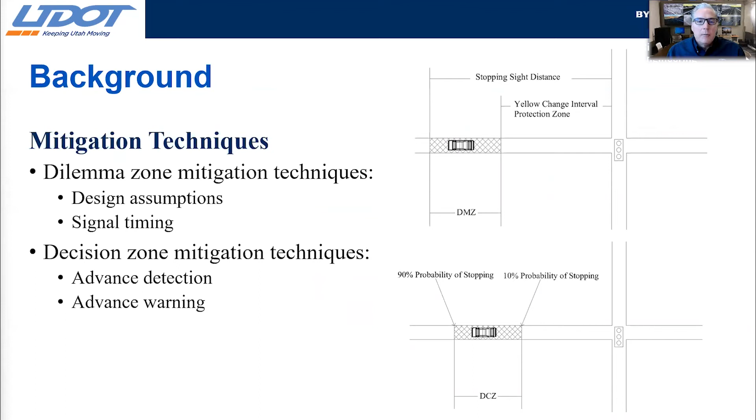The purpose of this research was to evaluate both the dilemma zone and the decision zone. This was accomplished by looking at different design assumptions and signal timing, as well as options for advanced detection and advanced warning. In our literature review, we identified several different methods for advanced warning signs. These included primarily sign-mounted dynamic signs with flashers. But UDOT wanted to do something more, so we looked at blank-out overhead dynamic signs with flashers.

The study site that we did our analysis on was the intersection of 134 South and Bangerter Highway. This research was conducted back in 2004 and 2005. As you can see from these pictures taken at that time, there have been a lot of changes to this area since the research was conducted.

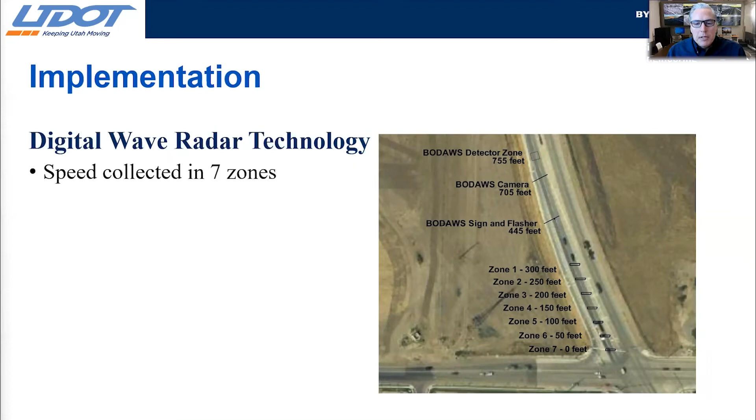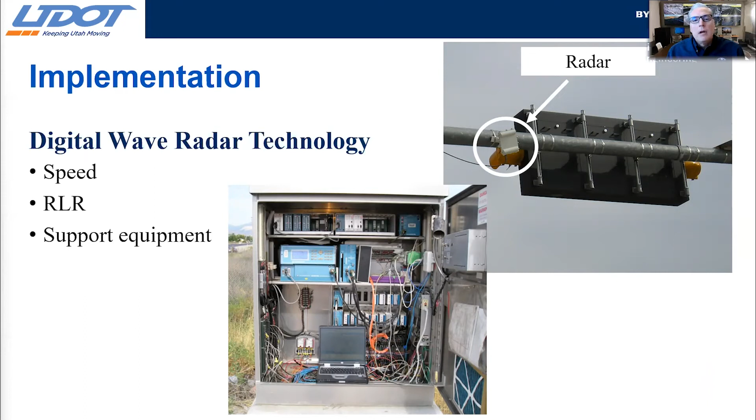To analyze the speeds in advance of the signal at 134 South, we used Wavetronix digital wave radar technology. At the time, Wavetronix was still developing much of their radar technology. In fact, this project was used by Wavetronix for the development of their SmartSensor Advance technology. We used the radar to collect speed data in 7 zones in advance of the signal. The radar detector was located on the back of the advance warning signal, and the signal controller cabinet was equipped with a laptop computer and support equipment needed to be able to collect the data at the zones specified.

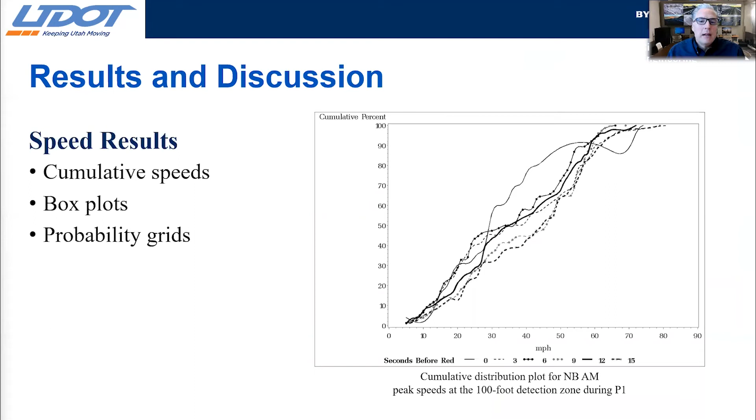One of the key indicators that we used to evaluate the advance warning signal were the results of the speed distribution at the intersection. We collected cumulative speed plots, developed box plots of speed data, and then generated probability grids of the speed results.

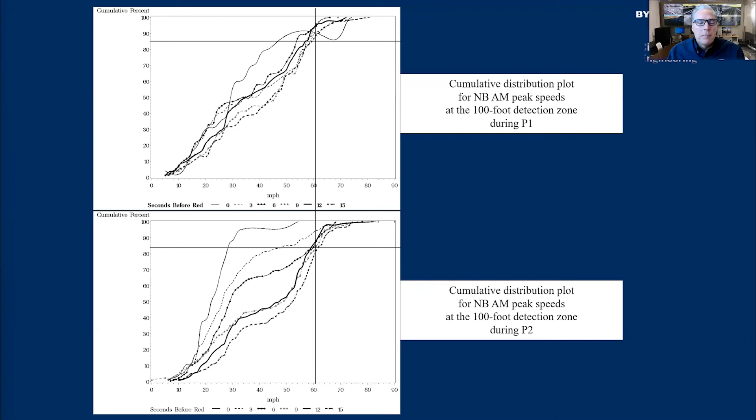The cumulative speed plot showed that prior to the installation of the advance warning signals, the cumulative speed distributions were relatively constant at the 100-foot detection zone, regardless of the time before red. After the advance warning signals were installed, the cumulative speed distribution plots showed very different results, especially for those vehicles 0, 3, and 6 seconds before the red. These drivers have been warned to prepare to stop, and the results showed that they did so.

The general conclusions from the research showed that the advance warning signal system did, in fact, impact motorist behavior. It also showed that when the signal was not operating correctly, motorists did not respond as expected. Minor changes were made to the lead flash time to find the sweet spot for the system design that we further developed in a follow-up research study. These systems have been installed along Bangerter Highway and in many other locations across the state, now with a static sign primarily for maintenance reasons.

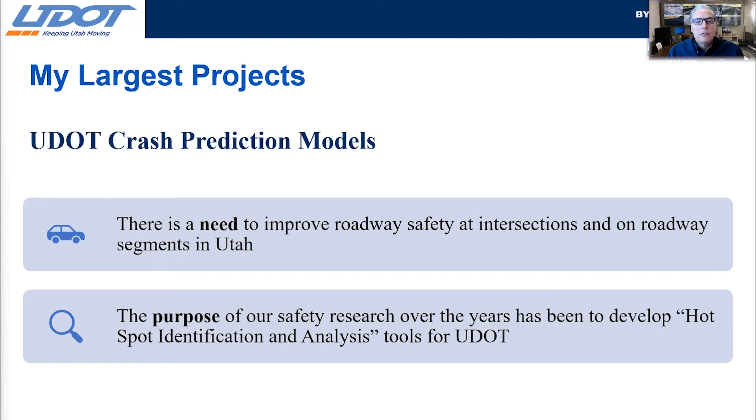My largest continuous project came about as a result of the need to improve roadway safety at intersections and on roadway segments in Utah. The purpose of this ongoing research has been to develop hotspot identification and analysis tools for UDOT to aid in their safety efforts. Over the course of the last 12 years, we have developed a series of models to aid in hotspot identification and analysis across the state. Today, I'll briefly introduce the most recent of these models, the crash analysis methodology for segments, or CAMS, and the intersection safety analysis methodology, ISAM.

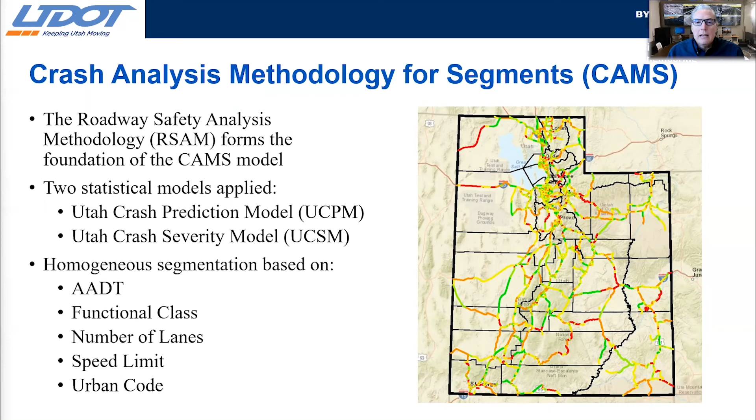The foundation of the CAMS model was the roadway safety analysis methodology, or the RSAM. Two statistical models were initially applied to the RSAM. These include the Utah Crash Prediction Model and the Utah Crash Severity Model. Both models were developed at BYU for UDOT and are formed from homogeneous segmentation of the roadway based on AADT, functional class, number of lanes, speed limit, and urban code.

The intersection safety analysis methodology, or ISAM, is the second model in the suite. While CAMS focuses on roadway segments, ISAM identifies intersection crash hotspots. These were originally based only on intersections with two or more state routes, but then we have continued to develop the model and expanded to a larger set of intersections. Again, two statistical models are applied to the intersections, and these models, however, are focused on intersection-specific crashes.

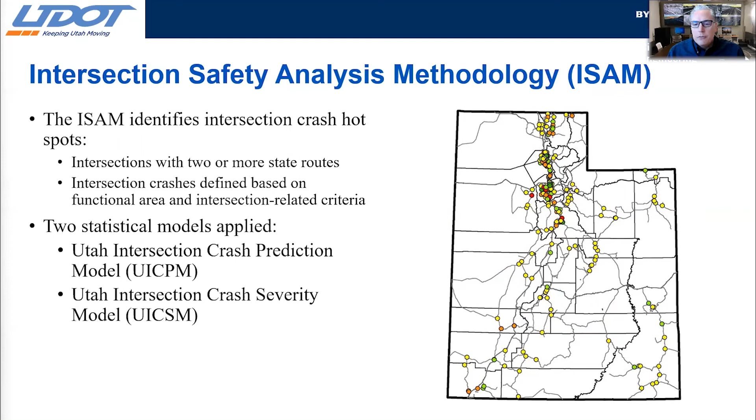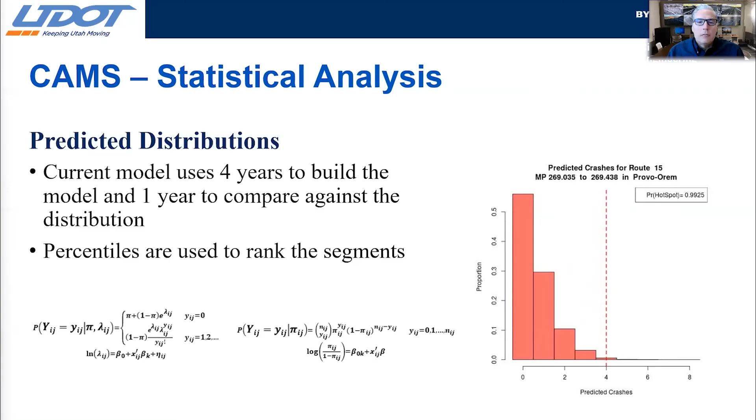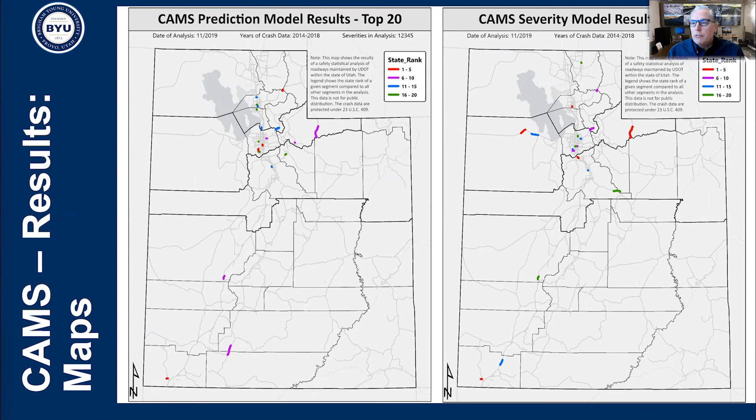Upon completion of the application of the model, the results of the analysis are reported in an Excel spreadsheet and then mapped using GIS to help visualize the location of the hotspot segments. These maps show the result of both the CAMS prediction model results and the CAMS severity model results. Note that if a segment shows up on both models, it means there are more crashes than predicted, and more of those are severe crashes than predicted. The last step in the process is the creation of segment safety analysis reports. These reports are also shared with the traffic and safety engineers to help them quickly evaluate the hotspots identified from the models.

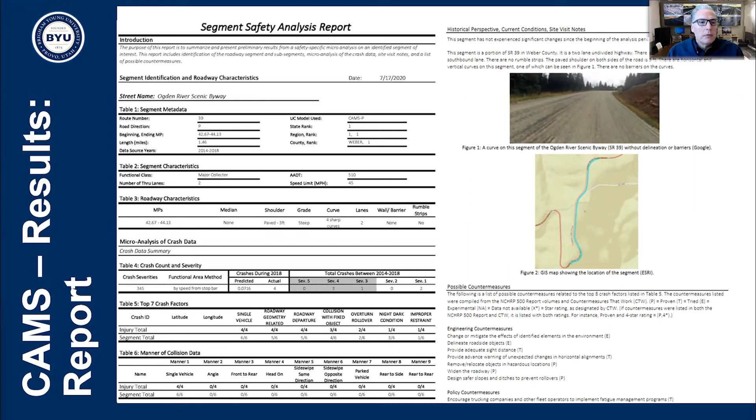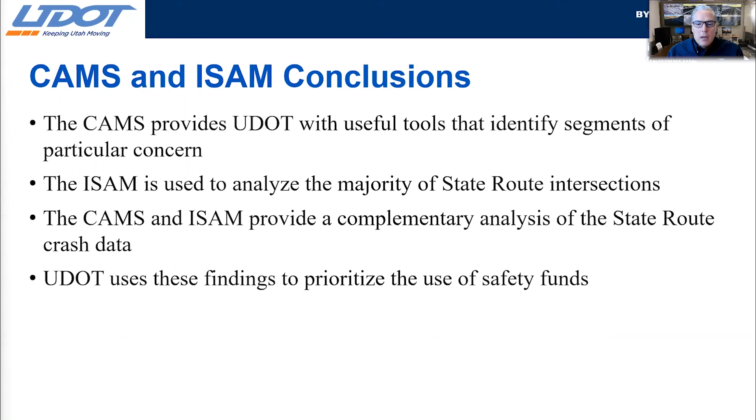There are numerous other steps involved in the CAMS and ISAM models. However, I will not provide that information today. I will note that the CAMS provides UDOT with useful tools that identify segments of concern along state roadways. The ISAM is used to analyze state route intersections to identify intersections of concern in the network, and the two together provide a complementary analysis of the state route crash data. UDOT uses these findings to prioritize the use of their safety funds.

I'd like to finish up by thanking the UDOT project champions that I've had the privilege of working with over the years. As you can see, there are several of them, and I'm really hoping that I didn't forget anyone. I would also like to thank the many employees that I've interacted with in the research division. These individuals have been very helpful in all of the research that I've conducted, and I've appreciated all of the work that they put in helping our projects to move forward.

Most importantly, though, I would like to thank the students. At the end of the day, although the research completed is very interesting and is beneficial to UDOT, the most important thing that is developed through the course of any research project is the knowledge and skills of the research assistants who work on these projects. I see these same individuals today leading in their companies and in various professional organizations. And I like to think that part of that is because of the work they did as a research assistant.

The reality of it is, some of them like their research so much that they're now looking for their own research projects and are competition to me in obtaining research funding. I'm not sure I really thought about that as I was moving forward in this process. But on a serious note, thank you for the work that you have done. I could not have done any of this without your hard work and dedication. Thank you for helping me to be successful in my career. I hope that I was also helpful in helping you to be successful in your career.